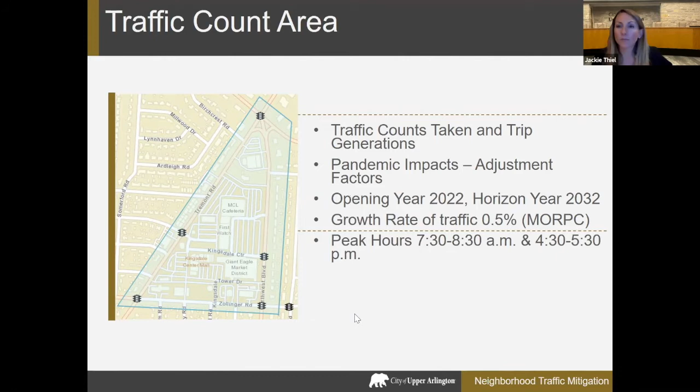Like we said, we're always looking at worst case scenarios with traffic impact studies, so we look at those peak hours. In the morning, the peak hour is 7:30 to 8:30 a.m., when most people are moving, going to work or school. In the evening, the peak in Upper Arlington is about 4:30 to 5:30 p.m., when most people are coming home from their daily activities.

The report is very long, lots of data in there. But when we look at our busiest intersection in the area, Tremont, Fishinger, and Northwest, we look at what our existing trips are. In the mornings we have about 2,600 vehicles going through that intersection, and in the evening peak about 2,700 vehicles.

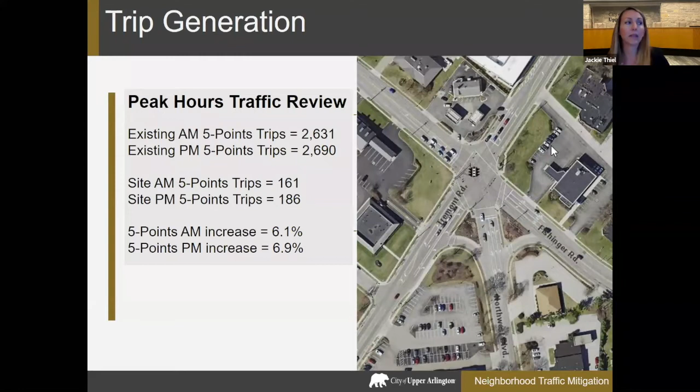When we look at trips generated, in the morning we have about 161 additional vehicles going through this intersection, and in the evening about 186. So comparing that increase, we're looking at about a 6% increase in the mornings and a 7% increase in the evenings through this intersection.

When we look at what's come out of the traffic impact study so far for recommended improvements, there's a lot of information here, but there's a circle showing the 5 Points intersection I just talked about. It shows we'll need to add a new right turn lane on Fishinger, an eastbound right turn lane.

We'll also be extending the existing turn lanes southbound on Tremont for left-hand and right turn movements. Additionally, we'll have fiber installed on Tremont from Fishinger to Zollinger, which will be a required improvement so all of these signals can talk to each other.

As you see here at Ridgecliff, there's a new signal proposed for the main entrance into the new development. We want all these signals to be able to talk to each other and coordinate the corridor, similar to what we do on Lane Avenue. On Lane Avenue we do that wirelessly, but in this case we're looking at doing it through fiber, which is a little more reliable.

Additionally, at the Ridgecliff Road and Tremont intersection, we currently have a pedestrian median island that adds a buffer and pedestrian refuge when crossing the street. Since we're putting a signal there, we'll lose that pedestrian refuge island, though it will still be a good crossing because it's signalized. So we want to add an additional crossing to match what's at Ridgecliff now, with a pedestrian refuge island, which will be a requirement to install.

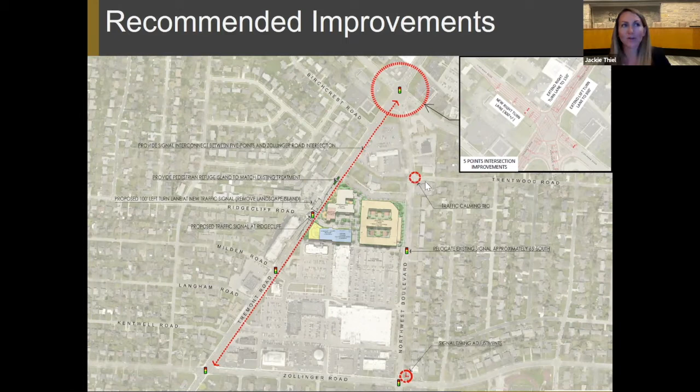And then you can see here at Trentwood, we just have, that circle doesn't mean that there's a traffic circle going there. That just means traffic calming to be determined. And that's what we're here tonight about.

So when we look at the neighborhood adjacent to this proposed development, you can see the green dashed lines. That's where we are looking that the cars should be going. Those are our major collectors and arterials in Upper Arlington, and that's where we want vehicular traffic to use to access our commercial area.

So when we look at Tremont Road, our average daily vehicles are about 8,000 vehicles per day, and the capacity of Tremont Road is about 15,000 vehicles. So we have plenty of capacity there. And then similarly on Northwest and Fishinger, we have plenty of capacity. So what we want to prevent is as much traffic entering this neighborhood as we can.

And I just highlighted, the yellow here is obviously very important. We look at the new high school entrance here. While we look at the high school, we don't expect that traffic pattern to change, and I'll show you why in a little bit. But we do see that connection around there.

So I had mentioned earlier that we did do a neighborhood traffic study, and we put out traffic counters on Trentwood Road, Brandon Road, Mount Holyoke, Kirkley, and Bembridge Road. And this was most important to give us a base point of where we are today, and look at what the speeds are today and what our average daily traffic count is today.

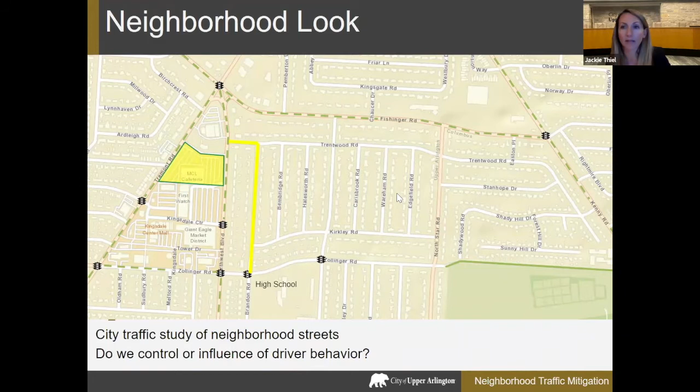And then we'll be working with police as well and letting them know that we have those speed radar signs up there. What you may have noticed around town with our speed radar signs is we like to put them up for about 3 months at a time, and then we start moving them, because with the studies that we've done, we found that they're most effective when we keep moving them. If you just leave them in place for a very long time, not as effective. The only permanent one that we have is in front of Tremont Elementary as a constant reminder of vehicle speeds when they're traveling in front of that school.

So looking at, we also, with our traffic study that we did, we pulled the crash data in the neighborhood for the last 5 years. And I know there's a lot going on this map, but you can see intersection crashes within the last 5 years. There's 14 in this area that's surrounded by red. You can see the highest was here at Trentwood and North Star.

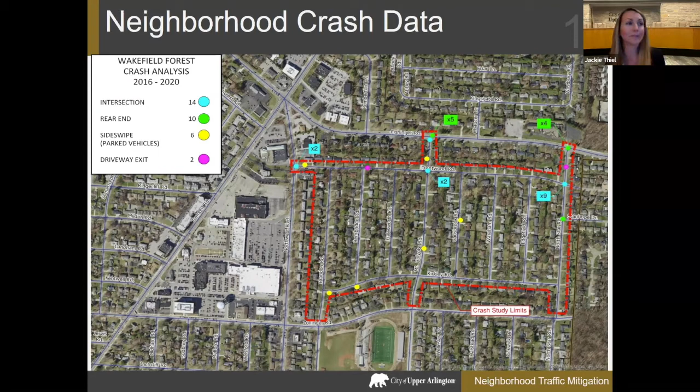So I know everyone wanted to look at existing parking restrictions. Right now in the neighborhood we have it pretty open, there's minimal parking restrictions. That's something we want to talk about tonight, and we're going to have a poll on that.

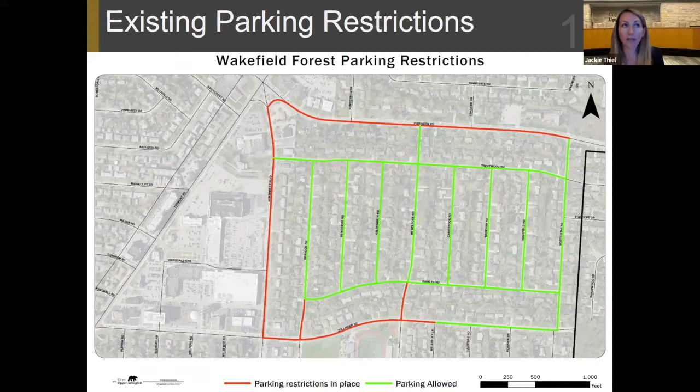Additionally, their proposed parking lots are adding 9 additional spaces from what they were at before, but the city is going to be installing angled parking on Brandon Road next year, on the side closest to the high school, adding about 46 additional spaces. We're also going to try to add parallel parking on Zollinger on the south side adjacent to the school, adding about 30 spaces. So all in all, we're looking at about 85 additional spaces, which can really have a big impact if that parking was on neighborhood streets.

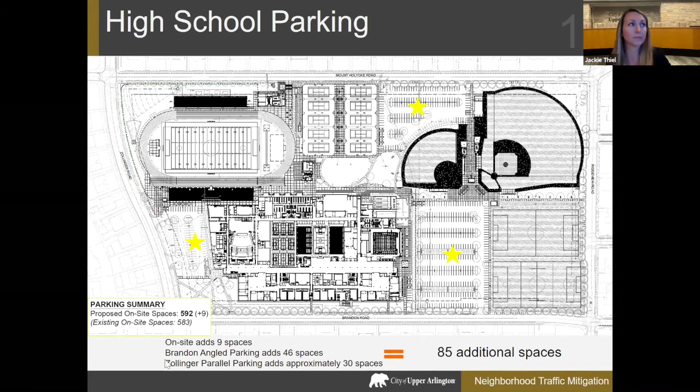Talking about the development parking a little bit, if any of you saw the council meeting, Chad Gibson, our community development director, went over this. But just a quick run through.

Our code is a maximum allowed of parking spots. The maximum this site is allowed to have for the new development is 1,037 spaces. They are providing 897 spaces. From what our development department has looked at, they're expecting a demand of less than 700 vehicles per any hour in a 24-hour period, and some of that's due to some shared parking that's possible.

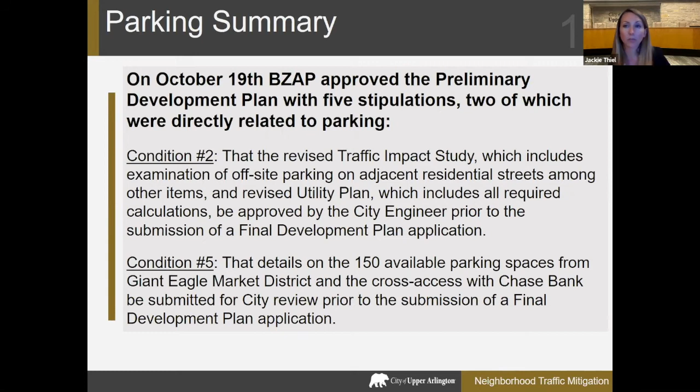Something to keep in mind is that we are still looking for in the traffic impact study, they're going to be doing an examination of parking on what the site can handle, and if there's any overflow parking, what they expect to do with that. And also to show us their commitment of those 150 available parking spots that's shared with the Giant Eagle Market District.

So I've talked a lot already, and I apologize for that. But I wanted to get everyone some background data and let you know everything that we've done. So now we get to go interactive - we talked a little bit about the parking restrictions, and I'm going to launch a poll here.

So, nope, that's not the right poll. I apologize, let me launch the right poll.

Okay, so when we're looking at the current parking restrictions, and I showed you the map, it's pretty wide open. How do you feel about the current parking restrictions in your neighborhood? So we have an option for more restrictions are needed. We prefer less restrictions because residents need this on-street parking for themselves and guests. No changes, but you want us to maybe look at a smart parking permit solution for residents.

I think some of you may be familiar with parking passes that have been done in other communities or around a college or something. We're not thinking that residents are going to have a pass in their car, but more of thinking of a smart solution where maybe license plates are registered and we have a way of looking at that. So that would be something we would look into.

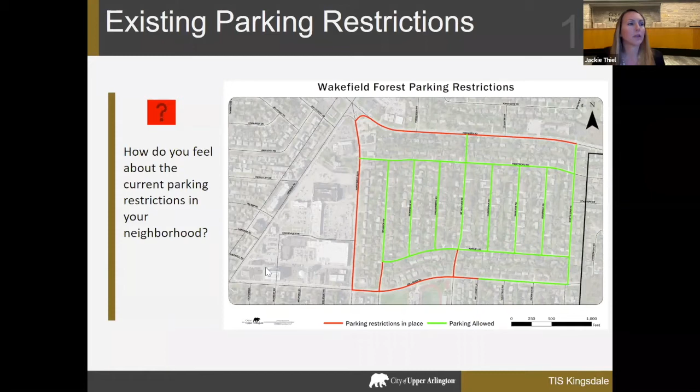So in 2022, we are resurfacing North Star Road. And that's when I told you we need to look at this intersection of Trentwood and North Star Road. That could be a possible traffic calming solution, and look at the intersection to see if there's anything we can do to reduce any crashes. But also, we're going to be installing sidewalk on one side of the street with that project. So that sidewalk will go from Fishinger down to Zollinger on North Star Road.

So looking at other things, I'm going to go through these one by one after we go through the overview here. A possible idea is sidewalk on Trentwood on the north side, where I put it because there's more city right-of-way on the north side than the south side. That extra right-of-way lets us add a tree lawn between the road and the sidewalk and plant street trees, which also has a traffic calming effect.

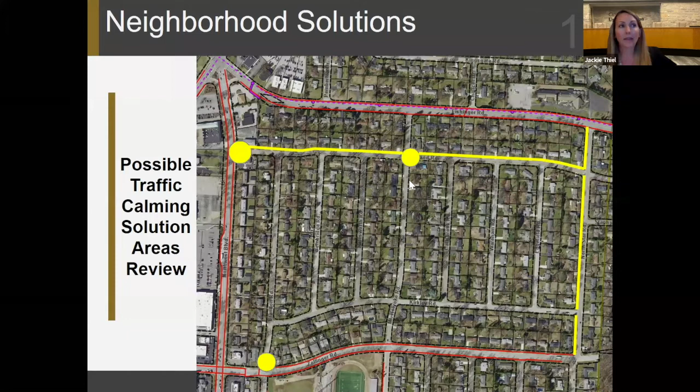Looking at a possible traffic calming solution here at Trentwood. I'm going to show you a possible traffic calming solution at Brandon down here, and then something from Mount Holyoke and Trentwood.

So for Brandon at Zollinger, I know many of you have asked me what we're finding works good and what people don't like. The traffic circle idea with one tree in the middle, I get a lot of complaints about that. In the past we had gotten complaints about the chicanes near Lane Avenue. So we're trying to find different solutions that work but are also aesthetically pleasing and don't impact your daily commute as much, because you become used to it.

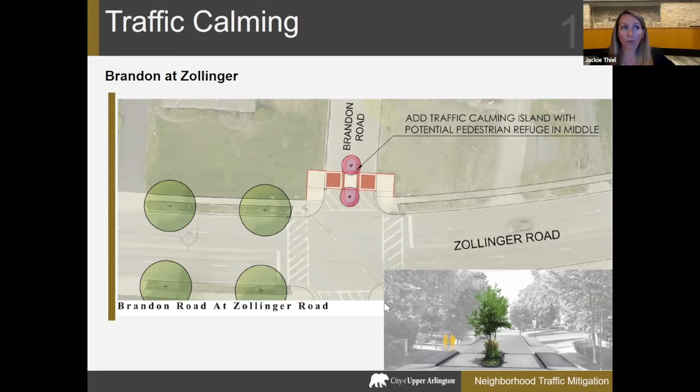That's why I'm not showing or proposing any recommendations for sidewalk on Brandon. It doesn't mean they can never be done in the future. There's always the city sidewalk petition process, where if you get 60% support on a block, the city will contribute 50% of the cost to install those sidewalks. But I think that would need a lot more work because of the impacts to all those trees.

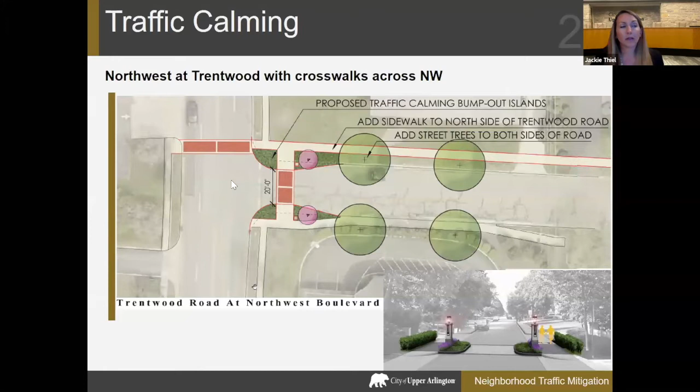So I think this would be a great location for a mini roundabout, something similar in size to what we have at Tremont and Reading. We may have to look at options for how to make this just a little bit bigger, so that we can get something really aesthetically pleasing and landscaped in the middle, not just a single tree. We want to make it a little bit bigger than that and give it more of that mini roundabout feel.

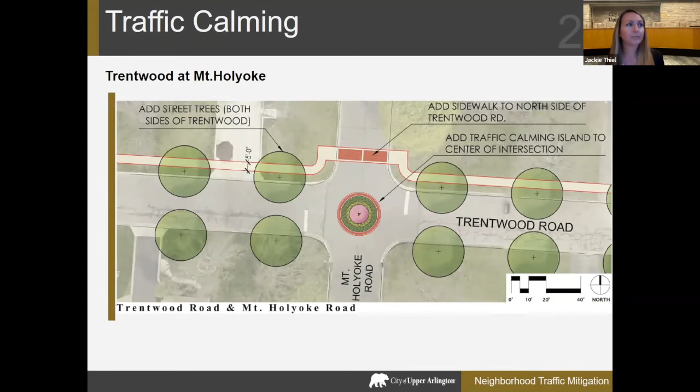So back to the polls. I have another poll, let me get it pulled up here. Launching the poll, here we go.

All right, when we are looking at the possible traffic calming solutions, which do you prefer? So we have neighborhood transitions entering Trentwood Road at Brandon Road, the installation of a mini roundabout on Trentwood at Mount Holyoke, the installation of sidewalks on the north side of Trentwood, all of the above, or no traffic calming.

We don't like that idea. And looking at this, maybe I should have made it so that we can select more than one, but it still gives us an idea of, do we like the idea of traffic calming or do we not? Please know that this is just to get us all thinking and looking at the same things.

I'm going to have the same kind of poll when we look at traffic restrictions. So I think I've mentioned to many of you, we think about, do we want to influence driver behavior and restrict our own access as neighbors, or do we want to just cut off access? Then we don't have that access either, but nobody else does. So influencing it is the traffic calming methods that we're looking at, but we will go to traffic restrictions in these upcoming slides.

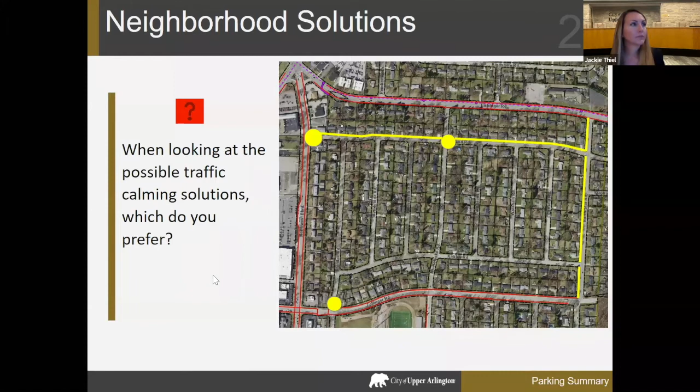So moving on. Okay, so I told you we were going to talk about traffic restrictions. So one of the ideas and recommendations I wanted to show you was how we could look at one-way traffic on Trentwood Road. We would make this one way between Brandon and Northwest.

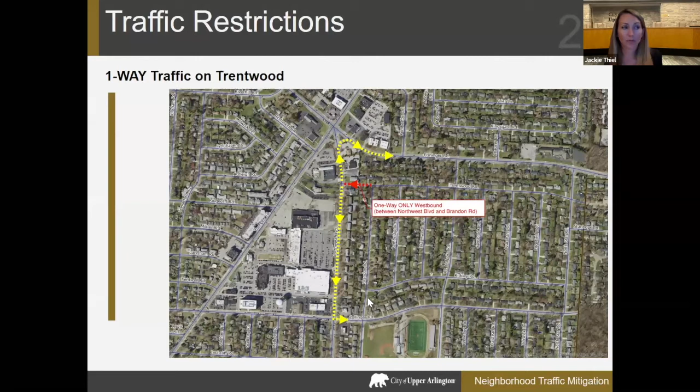So that means that you can only exit Trentwood onto Northwest, you can't enter Trentwood off of Northwest. So that means that you're going Fishinger or going down to Zollinger, because Trentwood is the only access point between Fishinger and Zollinger for this neighborhood.

And now I want to do another poll, because there's looking at this as one way, or there's a possibility that we could look at closing it and what impacts that would have. So I just want us to look at that together with a poll.

Okay, so when looking at possible traffic restrictions, which do you prefer? So one-way traffic westbound on Trentwood from Brandon, I'm moving this so you can all see, the closure of Trentwood Road with no access to Northwest, or no access restrictions.

So I would say one thing with access restrictions is if we go down that road, that's where we will focus on as ways to provide those restrictions, and we would not go down the path of traffic calming as much. But we are open to either, we just kind of want to get a feel for what the neighborhood's feeling with this.

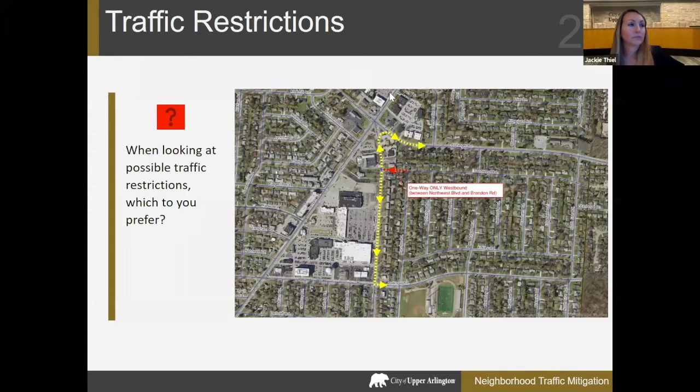And then we have one more poll that I want to do here. This gives us how we feel about access restrictions to residents versus traffic calming solutions. So let me get that poll up.

Launching. Okay, so this poll says, how do you feel about access restrictions for residents versus traffic calming solutions? One option is that we prefer traffic calming solutions that maintain the current access. We prefer converting traffic to one way or closing Trentwood to restrict access to the neighborhood. And the last option is that we don't really want to see any change to our neighborhood.

Give it just a few more seconds here. We're almost near the total number of participants that have been using the poll. Okay, I'm going to share the results.

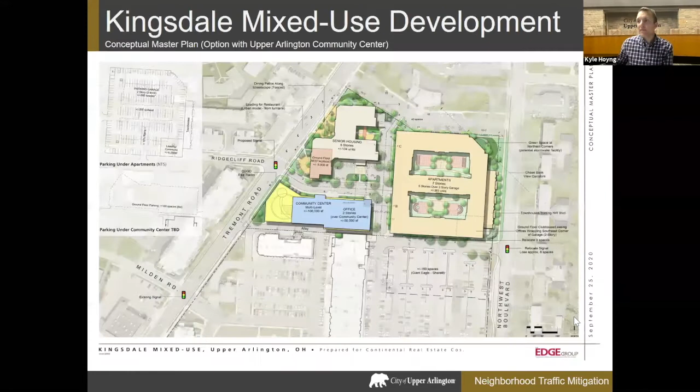Another question asked about the difference between, and more importantly, the effectiveness between stop signs and small traffic circles at intersections. Through studies and experiences, we in traffic engineering have found, and that's why you see so many roundabouts going in now, that roundabouts are safer. Even the big roundabouts, you see accidents either staying the same or going up just slightly, but the intensity and severity of those crashes is way down, where you're not seeing the injuries or deaths, maybe just a little property damage. That's why roundabouts have become so popular across the country recently.

It's pretty easy for someone to run a stop sign or roll through a stop sign, and so putting those in unwarranted is actually more unsafe. What we've found with traffic circles is you can't just roll it. You have to at least yield, and you're slowing down to make that movement around the circle.

Looks like Suzanne Russell is raising her hand to ask a question. Suzanne, I am going to allow you to talk here. Suzanne, are you able to speak? Looks like there's an error that popped up that says Suzanne Russell is using an older version of Zoom. Suzanne, if you're able to type in your question by chance, we'll ask that here shortly. Sorry about that. Are you able to unmute her, Kyle? I am. Oh, and it's not working. There's an error, it talks about an older version.

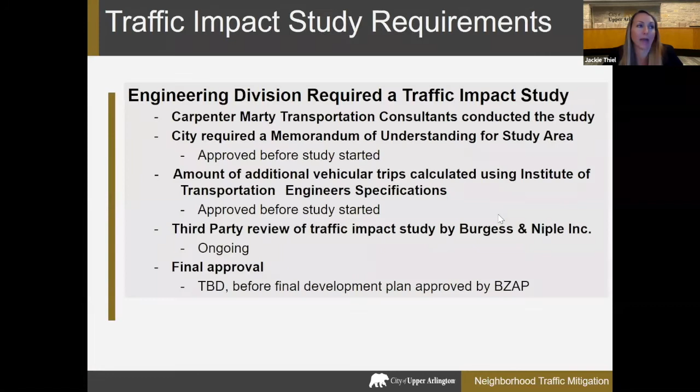But a lot of this can be from what the neighborhood is doing as far as access, how most of you go in and out of your neighborhood from the other streets. And we're obviously getting some cut through, but I'm not seeing any of these numbers alarming. I mean, it doesn't mean that I don't think we need to control speeds, and we want to look at ways we can make traffic calming on Trentwood and Mount Holyoke, and that's what we're here doing tonight. But I don't see anywhere that we need to say, oh my gosh, where is this coming from?

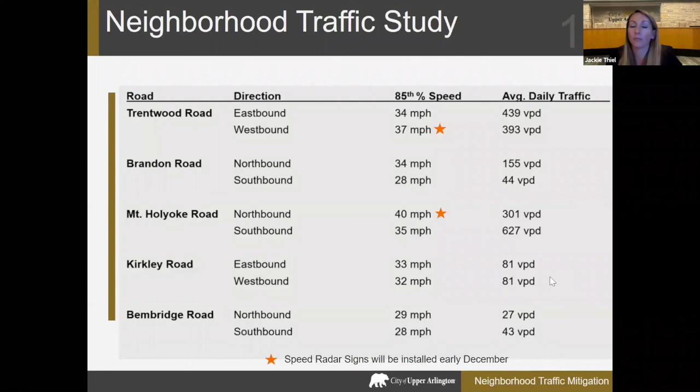So just to try to give you some context, feel free to email us if I missed any of your questions there. All right, Jackie, looks like Terry Flanagan has a question.

Yeah, there again, I'm somewhat new to Upper Arlington. I've only been here about 5 years, and I live at 3145 Edgefield. So I see all the kids. I'm retired, and so is my roommate. Our third roommate, she still works because she's younger. She's in her 50s, but I'm just saying, I don't like what is going up and down Trentwood.

People around here walk, they walk their dogs, they walk their kids. We've got to figure out an acceptable way for this community and the city of Upper Arlington to agree how to mitigate the traffic on Trentwood and Mount Holyoke so that the children, as well as the residents, are not so much in danger.

Like I said before, I'm not fond of roundabouts. I'm 69 years old. All they do is confuse me, but I'm getting there. I just worry about all the traffic up and down both Trentwood, Mount Holyoke, and now Kirkley. It's dangerous, and people fly up and down both of them.